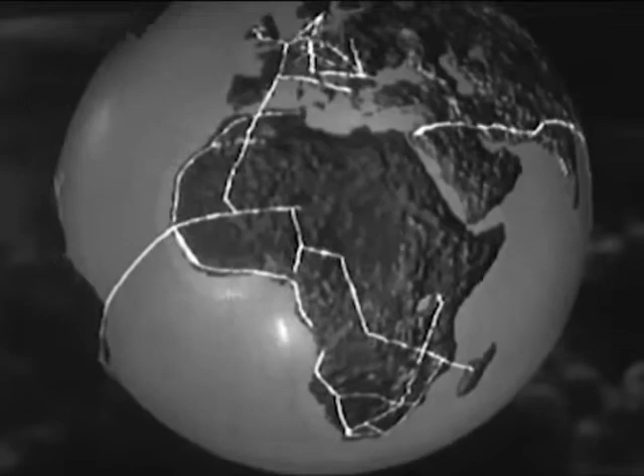Worldwide coverage, but it has not been accomplished in a day. It is the result of a smooth-running combination of men and machines. In that combination lies the story of Lockheed itself. It is a success story, modern, exciting, typically American.

The Lockheed Aircraft Corporation plant, Burbank, California, in 1926. And today, the same company, the same location, but quite definitely not the same plant. As recently as 1932, sales aggregated the overwhelming total of $23,298.03. In 1940, actual deliveries amounted to more than $42 million. And conservative estimates indicate that in 1941, this figure will be more than doubled.

And to the men of Lockheed belongs a large share of the credit, to their skill and to their loyalty. They are a cross-section of typical American workmen: drillers, riveters, tool makers, die casters, machinists, and technicians.

In 1931, there were only 300 of them. In 1941, over 35,000. Every man who checks in, from office boy on up, has taken and passed exhaustive tests covering intelligence, temperament, and special aptitude to prove his individual ability. 35,000 American workmen, the right men for the right jobs to build the best planes.

This is not a trick shot made with mirrors. It is the drafting room of the engineering department where every new Lockheed has its beginning, a beginning conceived with the purpose of supplying the answer to definite needs of the aviation industry. To attain this goal, over 850 engineers make over 5,000 drawing plans, devoting a total of over 200,000 work hours to their mission of creating one new design.

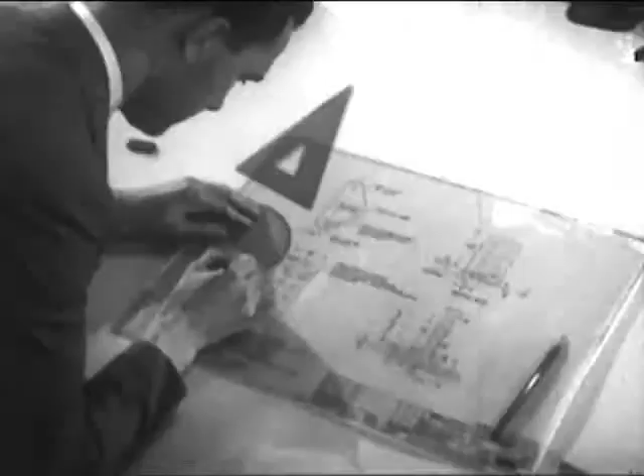The component parts of a modern airplane's wing, fuselage, and tail surface are almost countless in number, yet every single one of them must be engineered. Even the most minute part receives the greatest attention. Four separate drawings are made showing detail from four different angles. Although the part is no larger than a silver dollar, it will have to go a great deal further.

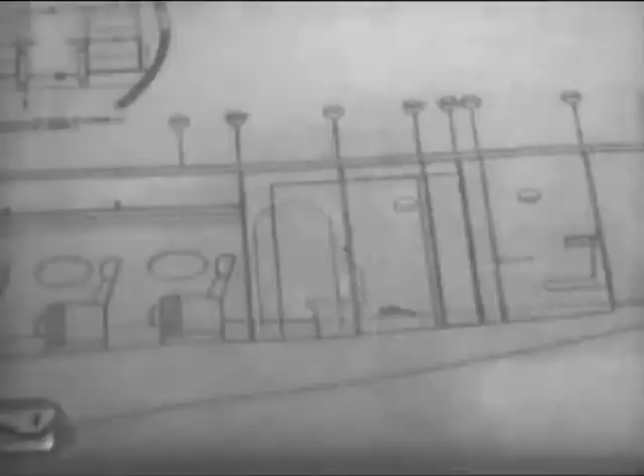The interior of a plane is one feature of design seldom associated in one's mind as coming under the supervision of the engineer. Yet one of his most important jobs is to provide utter comfort for passengers traveling through the air at high speeds. The Lodestar's cabin has been designed for this comfort. Inside, the sound of powerful motors is reduced to a pleasant hum by scientific soundproofing and vibration control. Restful chairs, ample space, and headroom are results of thoughtful planning.

And all Lockheeds are especially adaptable to the requirements of private owners. For businessmen to whom time means money, the Lodestar is convertible into a convenient and dependable office in the sky. The compact 12 becomes a comfortable lounge for attending important events anywhere at any time.

The cabin of Lockheed's new four-motor transport, the Excalibur, will look very much like this. Although the plane is still under construction, the engineers have built an exact replica, known as a mock-up, out of wood. In this way, every possible detail of passenger comfort can be effectively predetermined and applied.

But the ideas and plans that this man and the hundreds like him put into execution are not only those of Lockheed's chief engineers, but those of the entire flying world. For the Market Research Division maintains close contact with the operative branch of the industry.

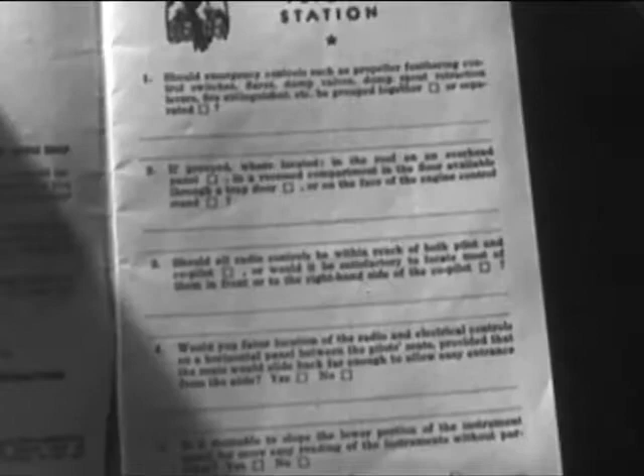The staff compiles lists of important features relating to a plane's design. These findings are set up in the form of questionnaires. If you were to build your own ship, on the flight station, where would you locate emergency controls? On the engine control stand, where would you put the levers? And the rudder pedals?

These comprehensive questionnaires are sent to airline executives, pilots, transport officials in every corner of the world: to Trans-Canada Airlines, R.C. McLeod in South Africa, Tri-American Aviation in Buenos Aires. The list is almost endless, but to mention a few more: American Airlines, Lieutenant Thatch of VP-5 Squadron Canal Zone, and British Airways. The replies to these pamphlets are carefully sorted, for they represent knowledge gained under actual flight conditions.

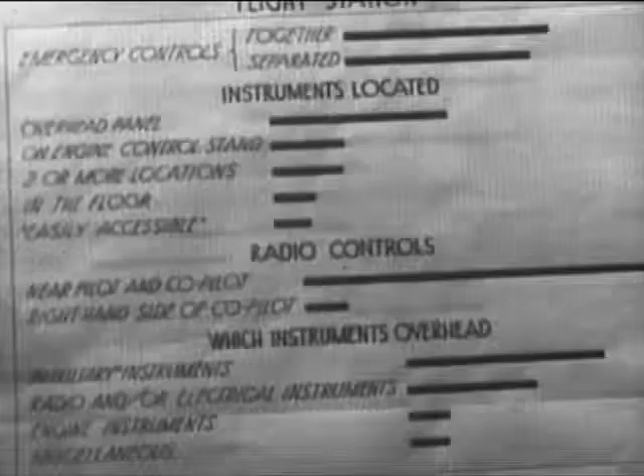Detailed graphs and charts are compiled by competent statisticians. No suggestion is too small. Every answer to every question is checked and noted. These findings are recorded in another pamphlet.

You told us this is the way you would do it: on flight station, on engine control stand, and on rudder pedals. We asked, are brake toe pedals desirable? 93% said yes, 7% no. That verdict is submitted by men whose combined opinions represent the experience of over 16 million hours of flying.

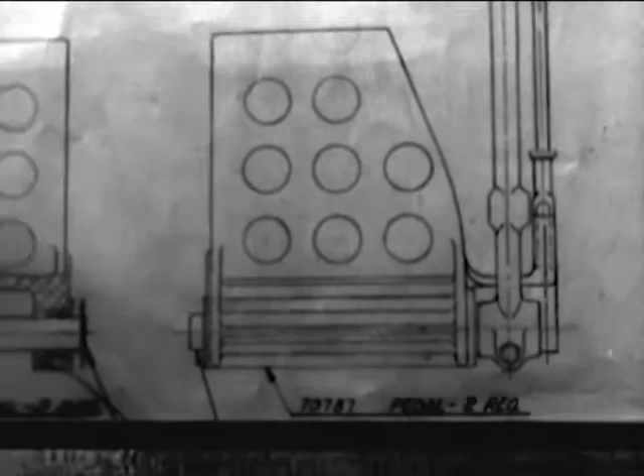These practical viewpoints, as gathered by market research, are submitted to the engineers. They combine these ideas together with their own creative ability in the conception and building of every new Lockheed plane. That's how Lockheed designs airplanes to suit the men who know airplanes best: operators, pilots, and regular airline passengers.

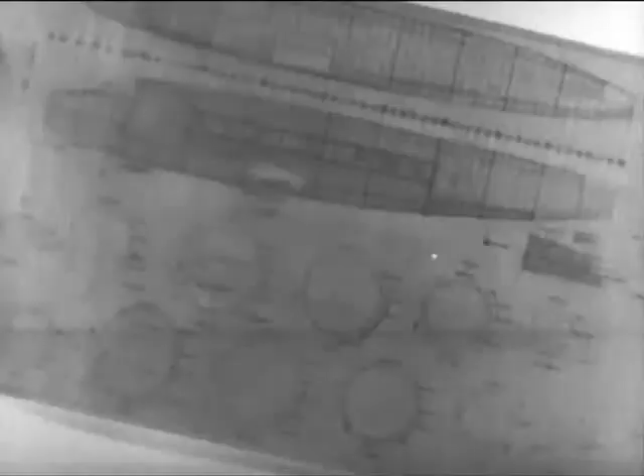And the first form a new plane takes is on paper. From these drawings and thousands like them, an exact scale model known as a wind tunnel model is made and is connected to instruments which determine its flight characteristics. The model is hand-carved, accurate to the fraction of an inch, weighs over 500 pounds, and costs more than $5,000 to build.

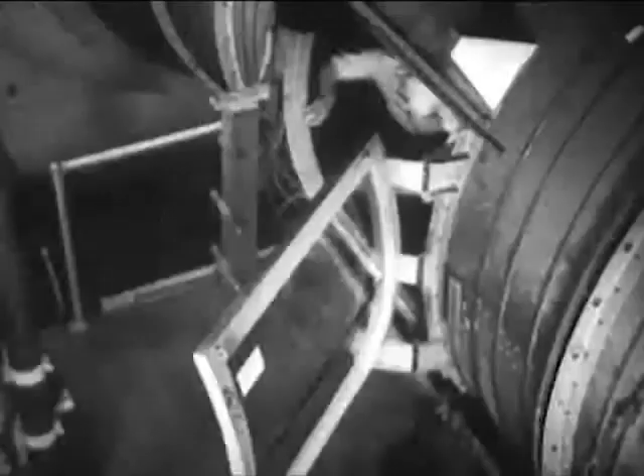The door is closed, the wind tunnel sealed. A flip of the switch, and the wind propeller whips up to speed. The model is exposed to a far higher velocity than this 90-mile-an-hour wind.

The small wind tunnel model is actually subjected to and withstands a much greater force.

From an idea to an actuality, from theory to fact, from a model to a completed Lockheed, the plane has been built. More than that, into it has been built the strength, ruggedness, and durability necessary for its safety and high-speed performance. But not so long ago, this shining plane was only a small part of a trainload of metal addressed to Lockheed.

For the metal inside these wooden frames is the stuff that planes are made of. Hard and strong, it must be fabricated by men and machines into the parts that make airliners.

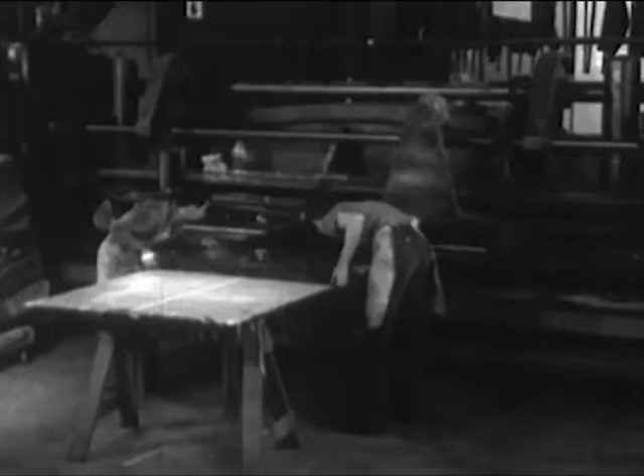Giant shears act as huge mechanical scissors. Metal sheets are slipped into place. The sharp blade strikes and cuts through them as if they were cloth.

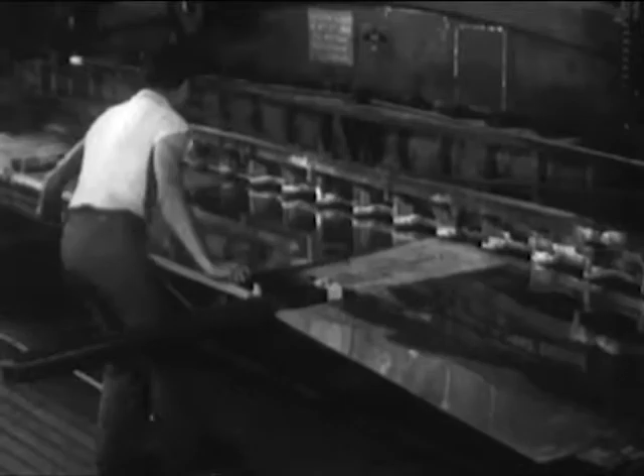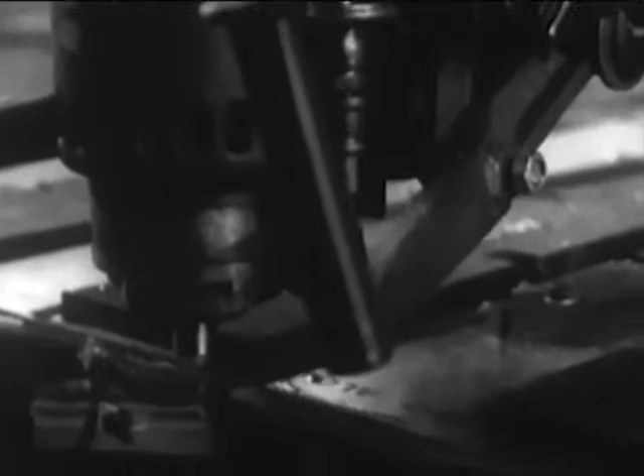The high-frequency router, a dental patient's nightmare, turns 15,000 revolutions a minute and cuts layers of metal into their first rough shape. The bit turns so fast that it must be cooled by a constant stream of oil.

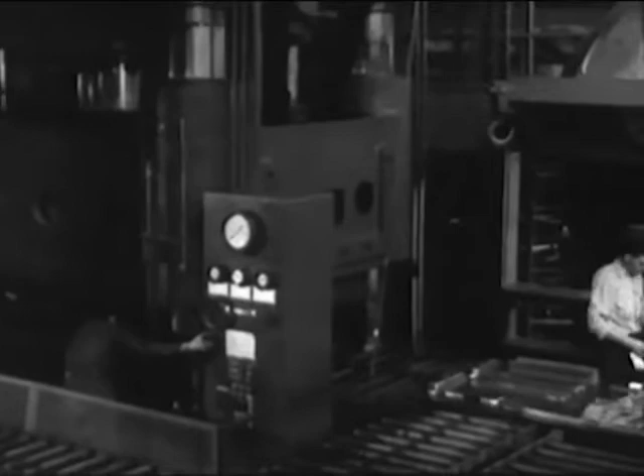The massive hydro press exerts an overall pressure of 9 million pounds, and it literally squeezes parts out of metal.

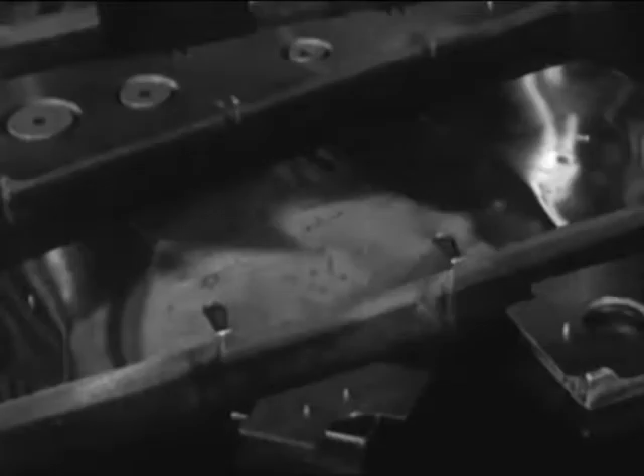An endless chain of roller conveyors carries a tray with the forms to workmen. They put the metal, which has already been cut to the correct size, in place on the forms. The tray now continues on its way into position under the press. The operator touches a switch, the press starts down, and look out below.

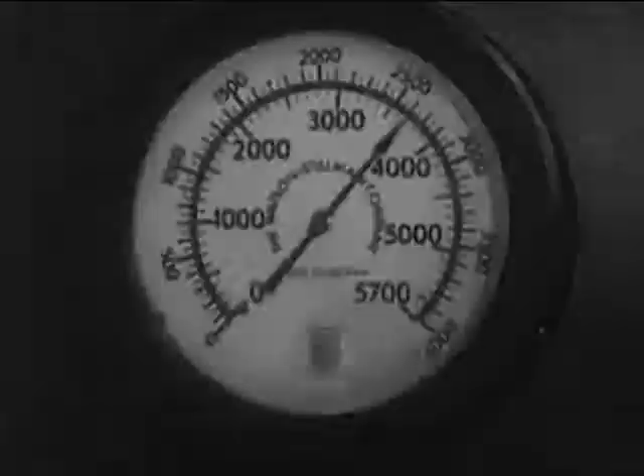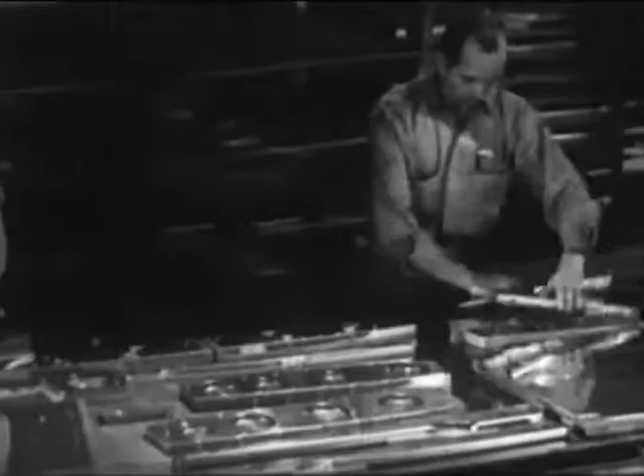Almost unbelievable pressure, an irresistible force, but under perfect control. And where plain sheet metal went in, finished parts come out. The hydro press turns out more parts in 1 minute than 2 men could complete in a whole day, and turns them out better and more accurately.

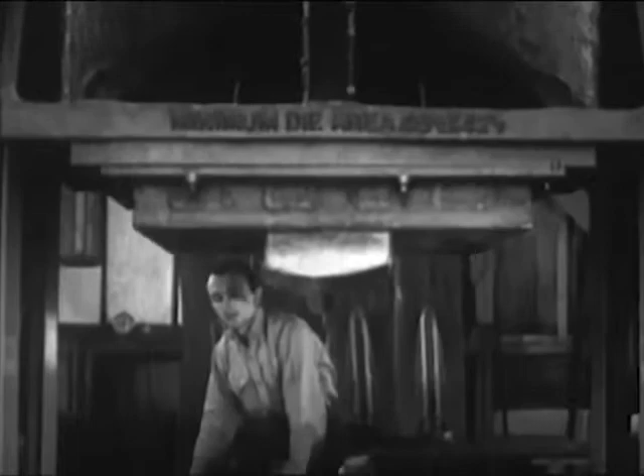A compressed air stamp which forges metal is an excellent example of powerful machinery under absolute control. Taps as gentle as a tack hammer, then the crushing impact. What a nutcracker this outfit would make. And yet its control is so delicate that it can crack an egg, at least so the operator claims.

Look out there, a little too hard and you'll have an awful mess. Be careful. Well, hello, stranger. You certainly have a brand new kind of a mama.

Skilled men and precision machines have fabricated these parts. But even metal can be strengthened and protected. To do this, there are several types of processing.

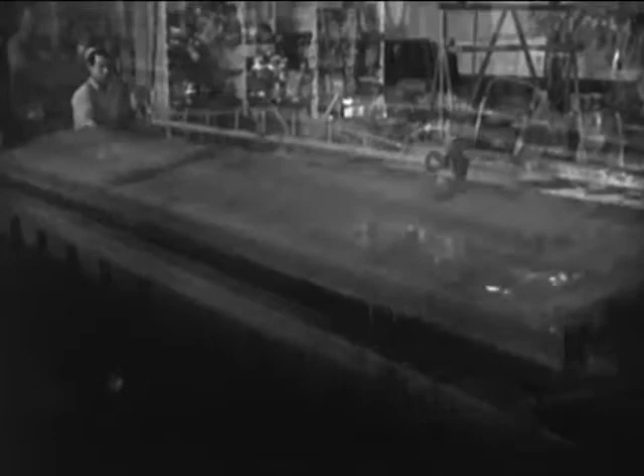Complete electrochemical anodizing baths provide parts with a protective coating of oxide film. This is a safeguard against the threat of corrosion caused by moisture. It is an interesting fact that these parts are protected against any harmful effects of moisture by being given a bath. Another type of bath is used for a different purpose.

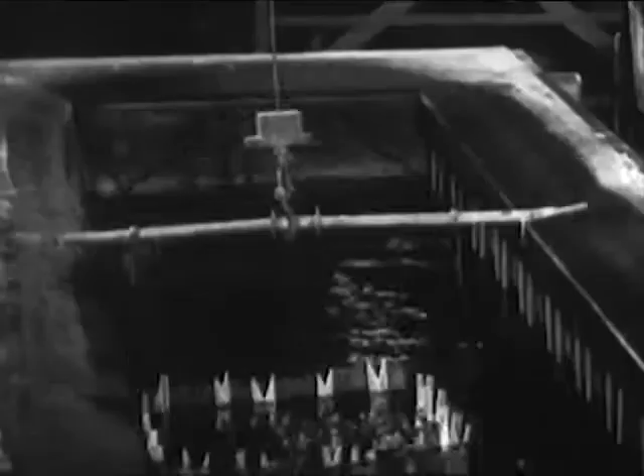In order to harden and thereby strengthen certain parts, they are immersed in a hot salt solution of sodium potassium nitrate.

In large ovens, other parts are hardened by baking at 1550 degrees Fahrenheit and quenching them in oil.

It is easy enough to say that these parts, which will eventually be the plane, are strong. To prove that they are, to constantly guard the Lockheed measure of strength is the duty of the testing laboratory.

A spectrograph is one of the most modern scientific testing devices. It analyzes the purity of the metal alloys which go into a plane.

Tremendous heat created by an arc burns sample filings of the metal. These filings are placed in a cavity on the lower of 2 acid-treated graphite electrodes and then burned.

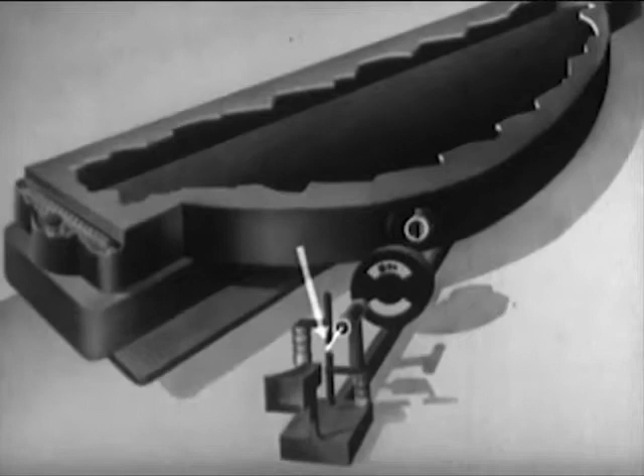The light of the burning metal passes through a lens and then through a rotating sector, the adjustable opening of which controls the amount of light falling on the slit.

The light now passes through the slit and falls upon a diffraction grating. This diffraction grating is a concave aluminumized glass plate on which 24,000 lines per inch have been ruled with a diamond point. The light is separated by the grating into wavelengths.

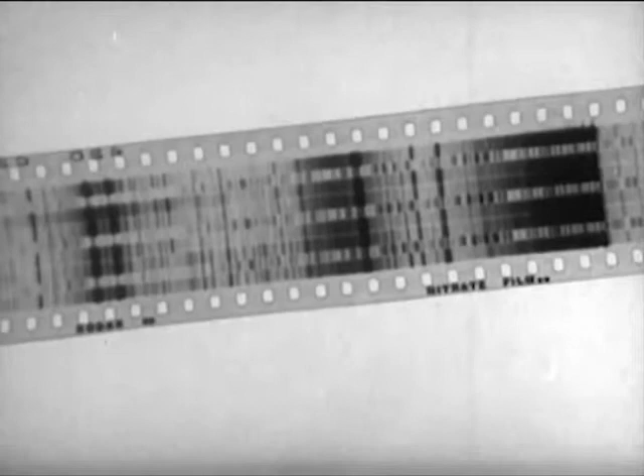These wavelengths, or light rays, fall upon a strip of film, and a photographic record of them is thus produced. Since each element has its own wavelength, from the developed film, it is possible to determine exactly which are present in the alloy. In this manner, the spectrograph immediately detects all impurities, and any inferior metal is promptly discarded.

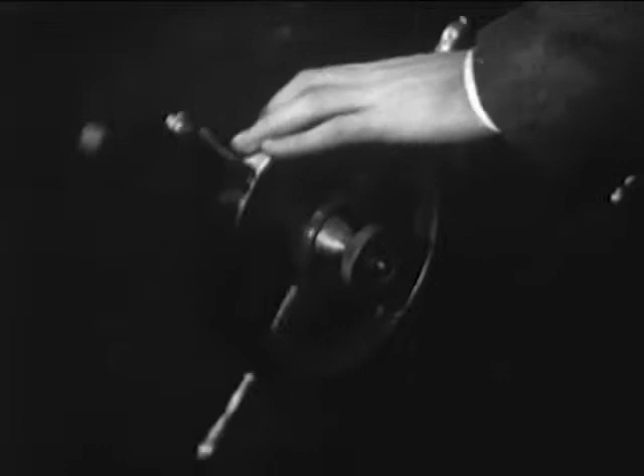The sole purpose of this huge machine is to break things. Its powerful jaws, capable of a compression of 300,000 pounds, are about to crush a small section of the wing in order to measure its resistance.

Now watch carefully. The upper jaw is clamping down with an invisible, relentless force on the seemingly frail strip of metal. But actually, just how frail is it?

60,000 pounds? 70,000? There it is, a slight ripple. The breaking point has been reached, and it takes a pressure of over 80,000 pounds to even bend this frail little section of a wing.

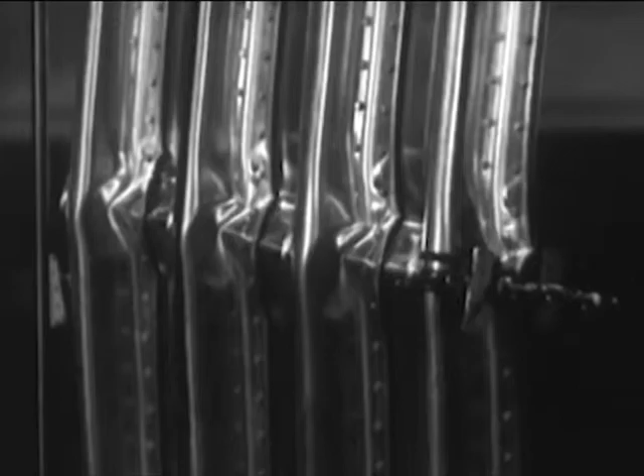For contrast, let's see what happens to a solid cylinder of concrete, which certainly appears much stronger. There's the first crack, and the concrete shatters completely under a pressure of less than 75,000 pounds.

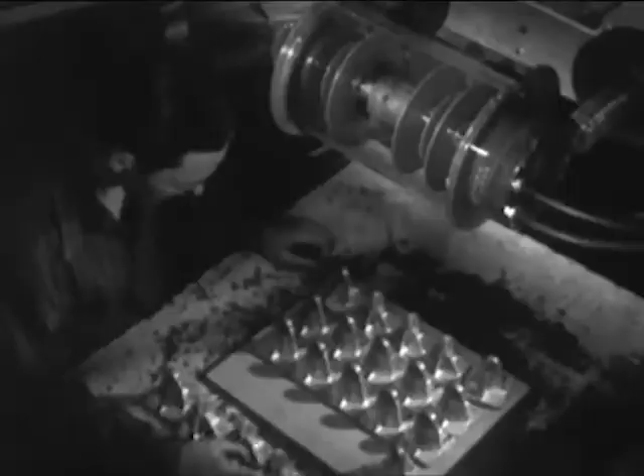All stressed parts, such as forgings and castings, are X-rayed for any possible flaws in the metal. Lockheed X-rays more parts than all other aircraft manufacturers combined. They may look new and shiny on the surface, but that doesn't matter. What are they like underneath? This batch is fine, perfect.

A different story here. Those slight, almost imperceptible flaws which doom a part to the scrap heap would be invisible to any eye other than the X-ray. Therefore, although it is important to know what is on the outside of a plane, every stressed part is X-rayed because Lockheed thinks it is even more important to be absolutely positive of what is on the inside. Yes, every part of this plane is built for the strength, ruggedness, and durability to achieve the highest speeds.

And there goes the Lodestar. Carrying a full load of 17,500 pounds, it speeds down the runway for the takeoff. In 15 seconds, after a run of only 860 feet, it leaves the ground and soars into the air, climbing at a rate of 1,200 feet per minute.

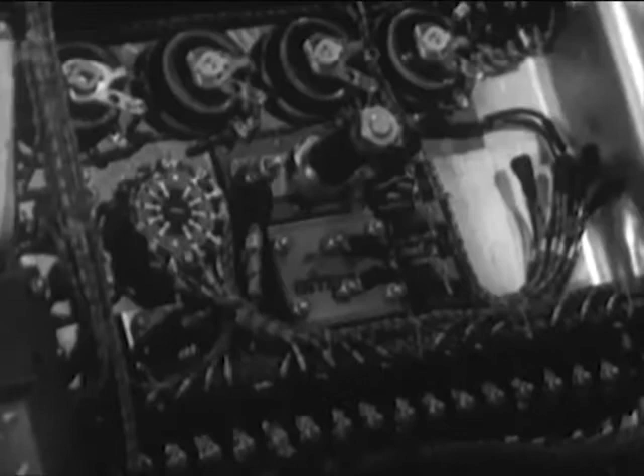And while the plane is in flight, the dials and indicators on the panel are the guides by which a pilot flies. Over a half a mile of wire connects them with the controlling instruments, which must be infinitely accurate before they are installed. In the instrument testing laboratory, each instrument and accessory is, to all intents and purposes, actually flown before being installed on the plane itself.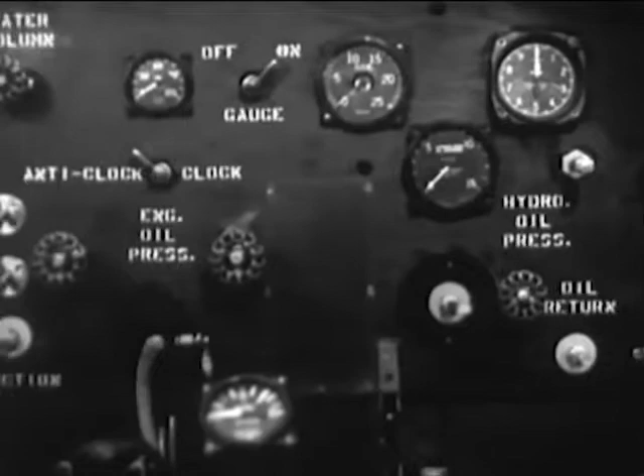For instance, on this stand, a motor duplicates the swing of a plane to test the turn and bank indicators. Here, tachometers are also tested, along with propeller governors, vacuum pumps, fuel pumps, starters, generators, and hydromatic motors for feathering propellers. The automatic pilot is checked by a vacuum system against mercury manometers.

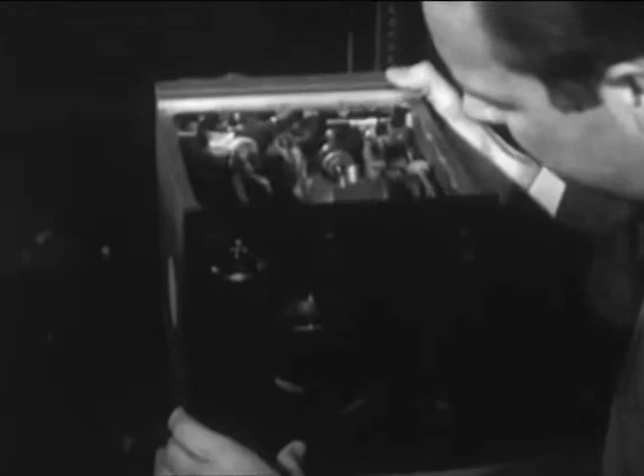This small box can guide a plane in flight, keep it as true to its course as the most experienced pilot.

An airplane is a chain of which the thousands of separate parts are the links. They must be forged together in order to shape the wing, the tail, and the fuselage. The duty of the wing is to provide the lift that sustains the flight of an airplane. Here in the plant, it must be assembled as flawlessly as it was designed.

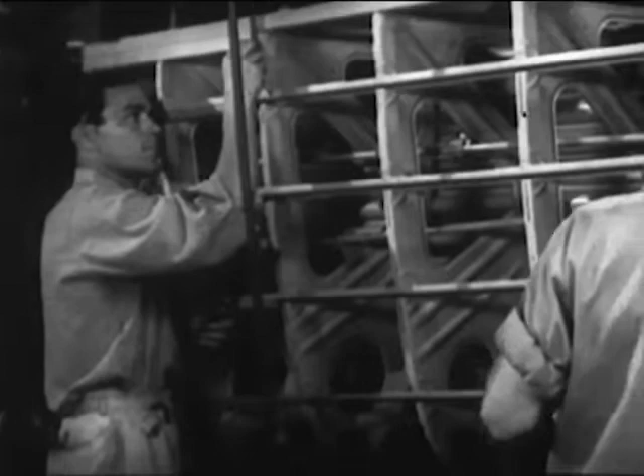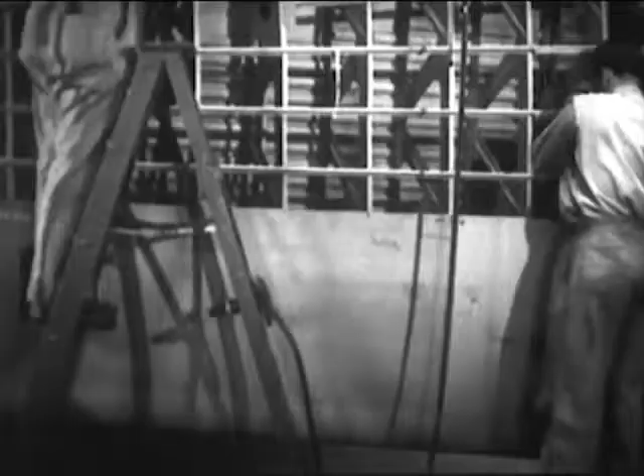Although a wing is generally considered as a unit, it is really composed of three parts: two outer sections and the center section. We are all familiar with the general shape of a wing, but while an outer section is in the first stages of assembly, we can get a good idea of the complex structure on the inside. Every rib and crosspiece has its purpose. Remember, it was just a small part of the wing that we saw withstand a compression of 80,000 pounds.

Each operation is executed with precision and care as the outer section moves down the production line and takes shape. High-speed electric drills punch holes for the rivets. There are more than 700 drillers and riveters who have all had previous training. Even so, before they're assigned to actual production, they must attend Lockheed's own school until they can uphold the plant's standard of efficiency and skill.

There are more than 50,000 rivets on a completed wing, and every one of them is checked, examined, and checked again. This requires an army of over 200 inspectors, such as this one. But by the time a Lockheed plane is assembled, every square inch of it has been inspected at least five times. Inspector number 158 finds this row perfect and okays it.

And the story of one outer wing section is the story of 10, of 20, of 1,000 sections as they move down the line in an endless parade. Mass production with the emphasis on precision and quality.

The assembly line for the center section of the wing is one of the largest and most vital units in the plant. It has to be, because the center section is the strong man of the plane. It must be constructed and assembled so as to be able to support heavy loads and to withstand great strain, for it unites the two outer wings with the fuselage.

The fuselage will eventually rest in the gap between the two shoulders, and the wings will be joined like arms on either side. The main beam of the center section is the strongest part, the backbone of the entire plane. Like a bridge, it must carry any burden with steadfast dependability.

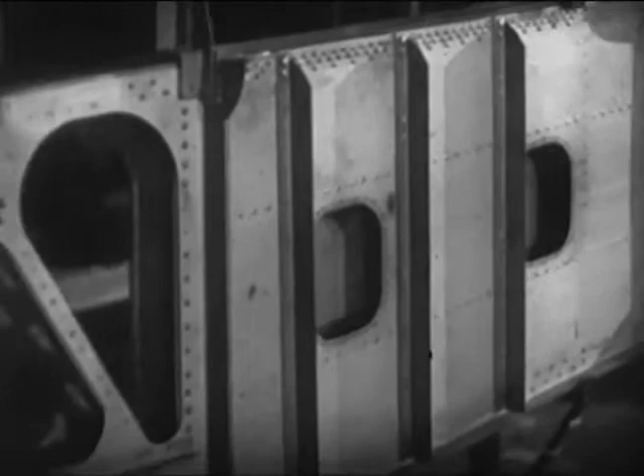And the main beam is built just like a bridge. At all times, it carries all of the flying load, the engine load, and the landing load. And it is stressed to support more than five times the total weight of a fully loaded plane. Completed and assembled, capable of supporting a static load of 70,000 pounds, the wing will do its job as the men who built it have done theirs.

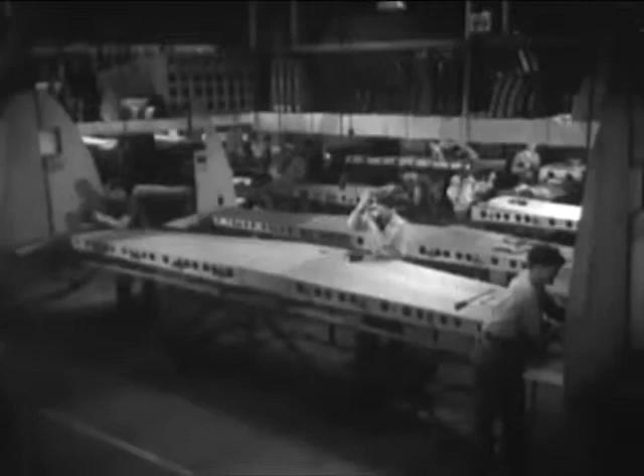The tail surfaces control the maneuverability of a plane. The use of twin rudders was developed by Lockheed and are one of the distinguishing features which point out every Lockheed. The fuselage is the body of the plane.

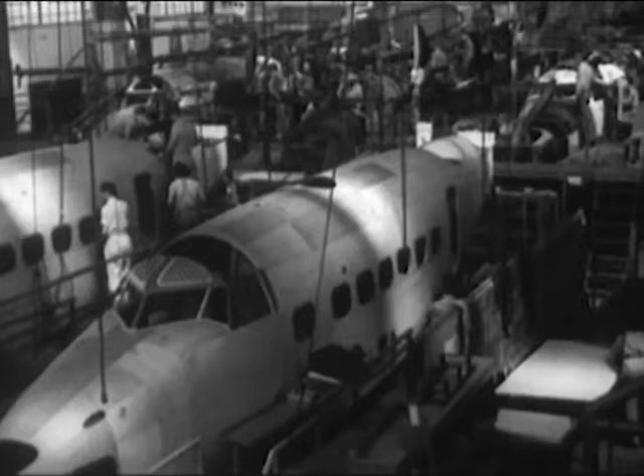It represents the final word in aerodynamic design and streamlining. During construction, these basic principles are built into the fuselage and applied to every operation from the beginning to the completed shell.

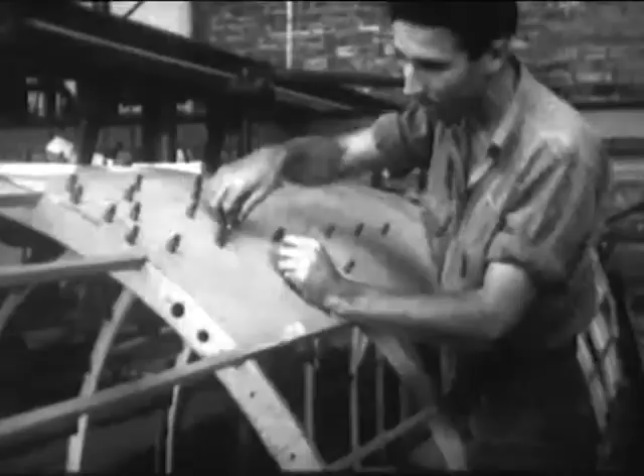As the first step in its assembly, the bulkheads are joined together by stringers, which form the basic shape and strength of the fuselage. Skin fitters then fit and shape the metal sheets, attaching them with removable fasteners. On their heels come the riveters, while every stage of the assembly is constantly under the close check of inspectors.

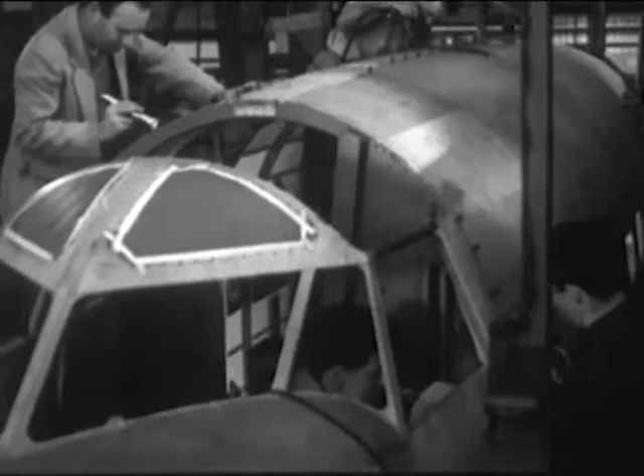Assembling with electric continuous spot welders facilitates production and gives many fuselage parts an extra smoothness for better streamlining. With an eye to the future, Lockheed is constantly enlarging on this process because better streamlining means greater speed.

And so another fuselage is finished and ready for mating with the wing. Like a ship being launched, it moves slowly down the ways. Slowly now, yes, but for just a little while longer.

Soon sunlight will be glinting from its metal sides. Its nose will point upwind. In the comfort of its cabin, passengers will read or write or sleep or think after their own fashion, and beneath it, the lakes, rivers, and valleys of the countryside will unfold.

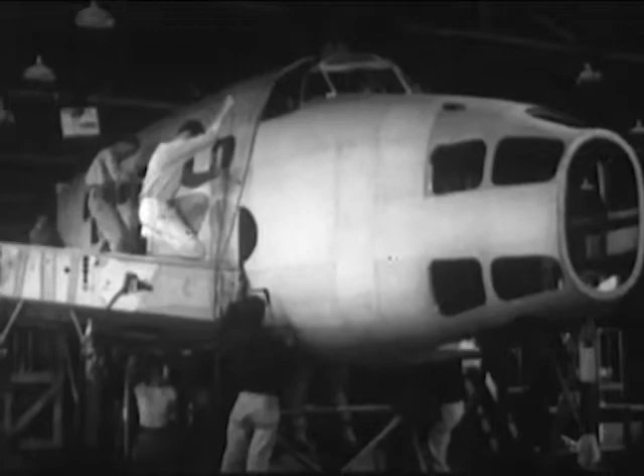Slowly still, the fuselage is lowered into place, united with the wing. And now, slow no longer.

Speed on the water. Speed on the snow. Speed on wheels. On rails. Speed on wings. There is truth in the slogan that it takes a Lockheed to beat a Lockheed.

As the plane approaches the field, it slows down for the landing. The Fowler flap has been adopted and developed by Lockheed. The flap gives a greater lift to the wing and provides a brake action to reduce the speed. The plane lands at 65 miles an hour, and from a height of 50 feet, it can come to a complete stop in less than 600 yards.

This Lockheed Lodestar, with its safety, its comfort, and its great speed, typifies the ideals of aviation in America. To protect these ideals, Lockheed is contributing its share toward national defense and the defense of democracy in other parts of the world.

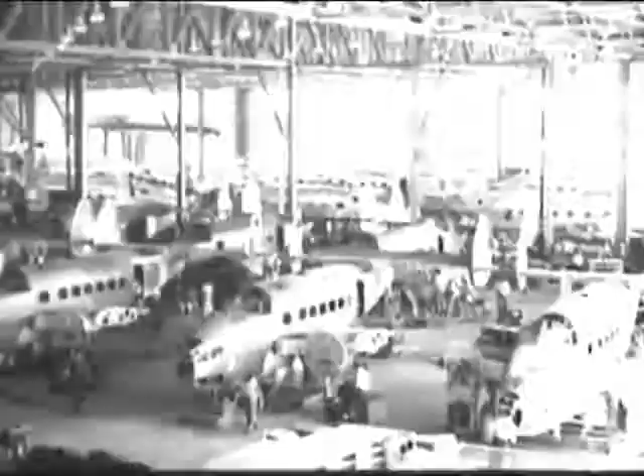These B-14 bombers, better known as the Lockheed Hudson bombers, are rolling off the production line at an ever-increasing rate. They have been ordered in great quantities by Great Britain and Australia.

When ready for delivery by boat, the Hudson bombers are dismantled. The sleek fuselages are carefully encased in canvas, and the wings, already stowed away below deck, are crated in wooden frames for safe shipment. When the planes reach their destination, they are easily reassembled and soon ready to take their places in the staunch defense of the British Empire.

And while these planes start on their long journey by water, others are being given their final test flights for the tough job ahead. And still more are winging their way directly toward Canada. In combat, in actual line of duty, the Hudson bombers have won a name for their efficiency and dependability.

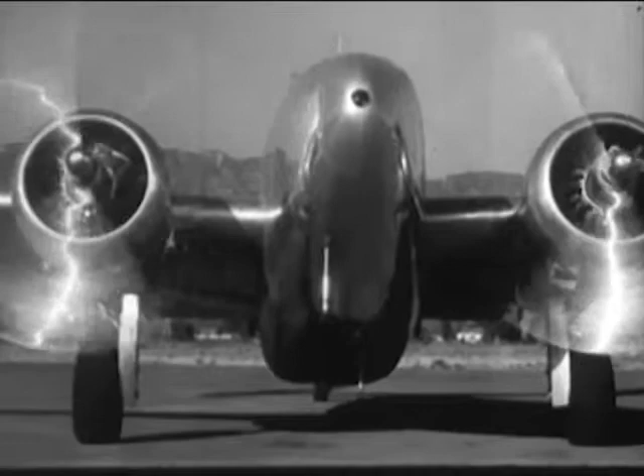As America builds its planes for commerce and for defense, it is well to remember that Americans invented the airplane and developed the modern conception of mass production used by Lockheed.

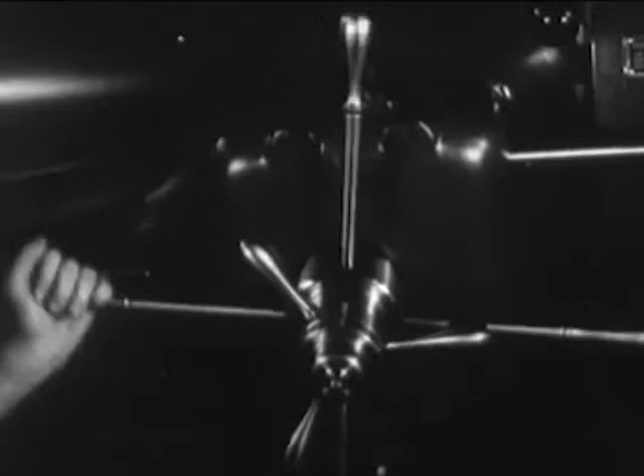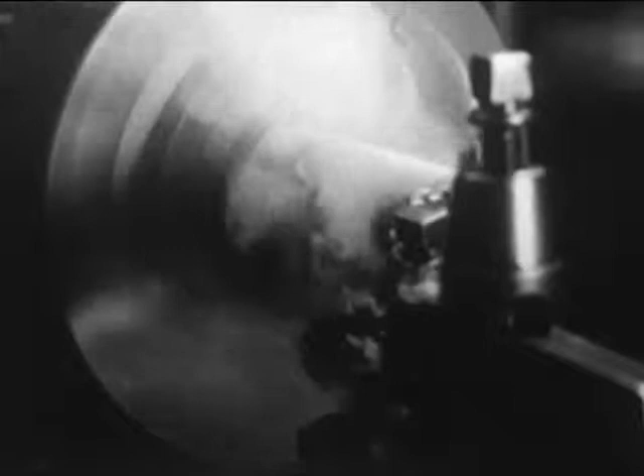It has been developed solely for national defense, and Army officials consider it the fastest military plane in the world today. The P-38, a man-made comet.

The P-38 is a completely new development in conception and design. The purpose of this deadly single-seater fighter is to prevent any would-be attacker from reaching his objective. Lockheed is building vast quantities for the United States Army, and many of its features are closely guarded military secrets.

But it can be revealed that the P-38 will climb a mile in a minute, and its motors are so quiet that it can approach any target almost without warning.

And as wings soar higher above America, so are soaring the hopes of free men the world over. For they know that whether it be for commerce or defense, ship for ship, American planes have no equal.

And just as Lockheed commercial transports serve the people, so do the Lockheed military planes stand ready to serve should the need arise. The striking power of Hudson bombers, the speed of the P-38.